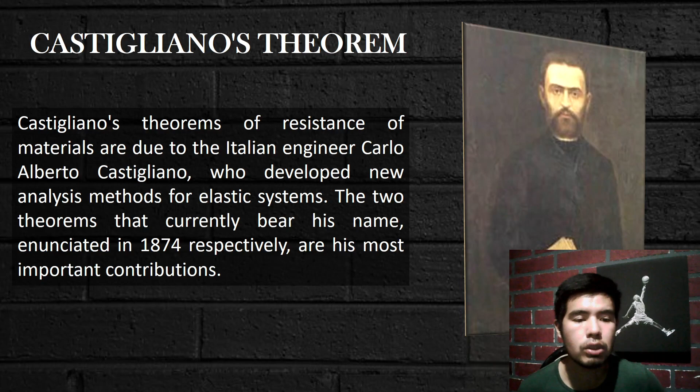What does Castigliano's theorem establish? Castigliano's theorem establishes that, in an elastic system, the displacement corresponding to any force can be found by obtaining the partial derivative of the deformation energy with respect to this force. The terms force and displacement are to be interpreted broadly, as applied equally to moments and angular displacements. Castigliano's theorem is a great tool for determining the deformation of complex structures.

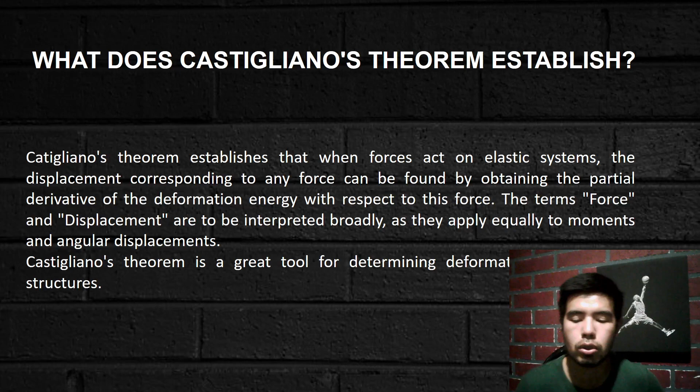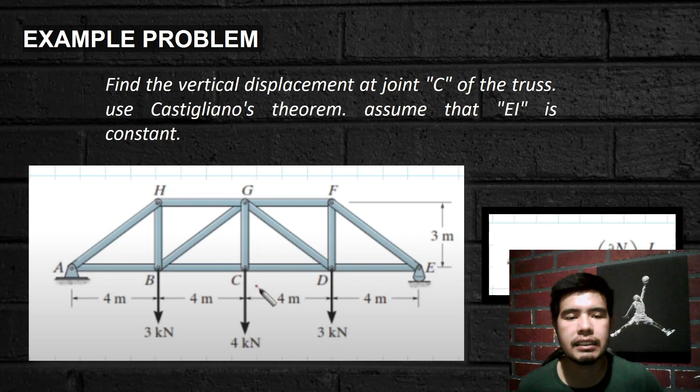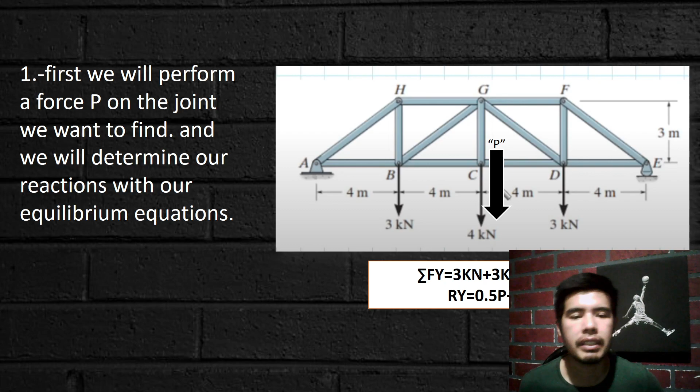Example problem. Find the vertical displacement at joint C of the truss. Use Castigliano's theorem; assume that AE is constant. First, we will apply a force P on the joint we want to find and we will determine our reactions with our equilibrium equations. Second, we will determine each element's normal force.

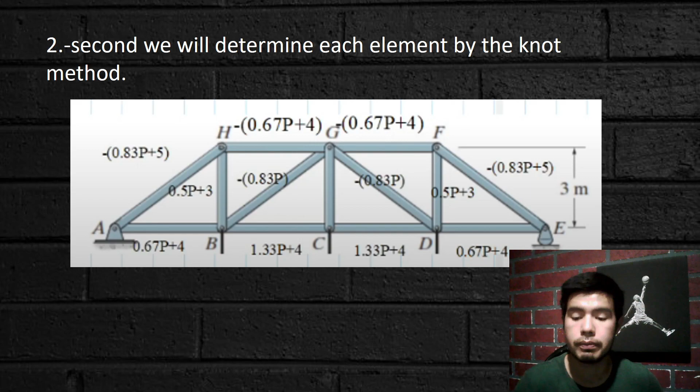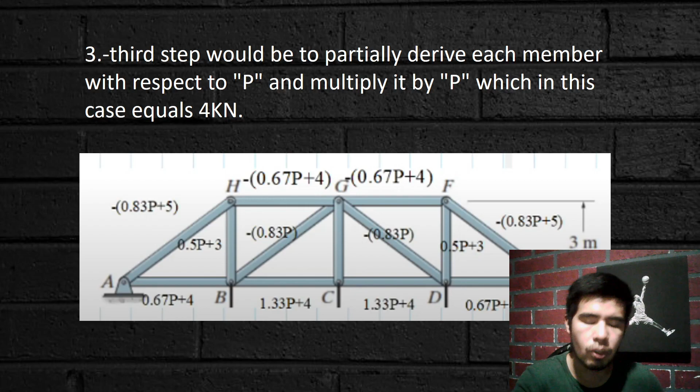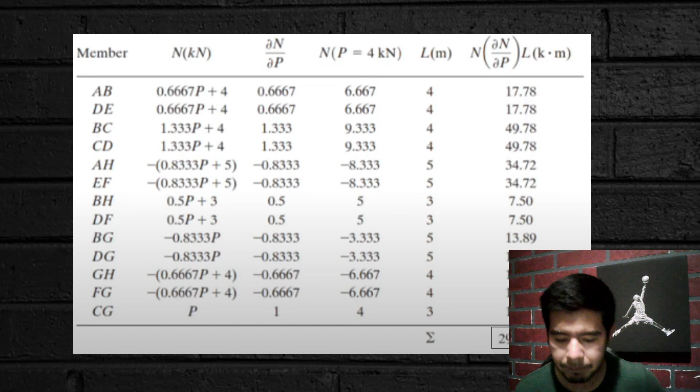Step 3 and step 4: take the partial derivative of each member with respect to P and multiply it with P, which in this case equals 4 kN. Next we will see a table where we show the result for each member based on the formula, and the result of the summation will be 294.89.

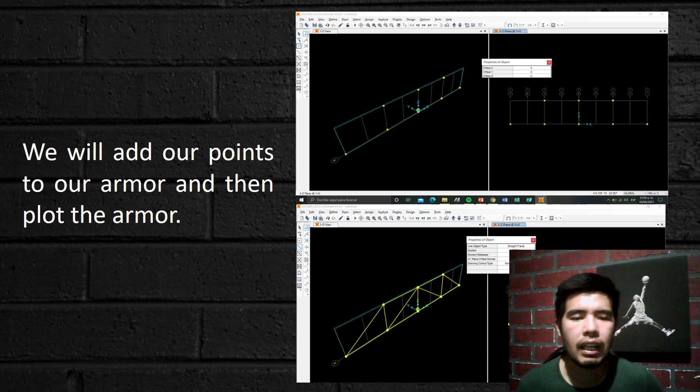Modeling in SAP 2000. First, we will start a new project. It will be a 2D truss. We will work in kN. We will add our points to the truss and the template of the truss. And we will insert our truss supports. The left side is a fixed support and the right side is a movable support.

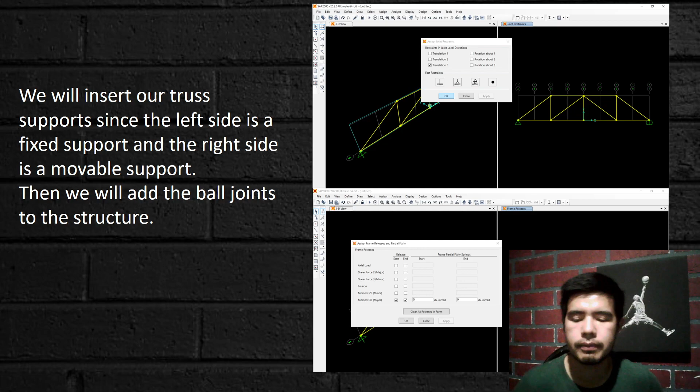Then we will add the joints to the structure. We will define materials, create a new material, define our section and then assign that section to it. We will erase the modal load pattern of the structure since we are handling only dead loads.

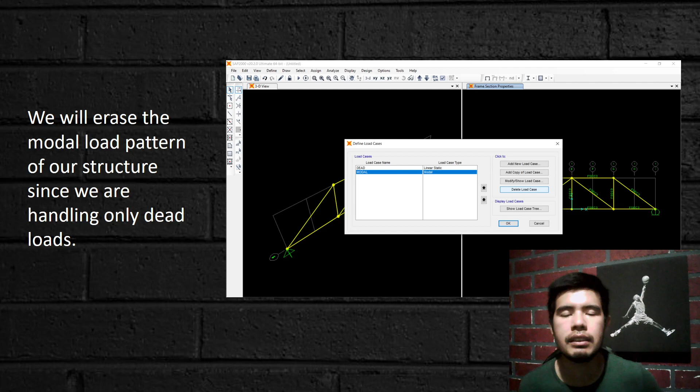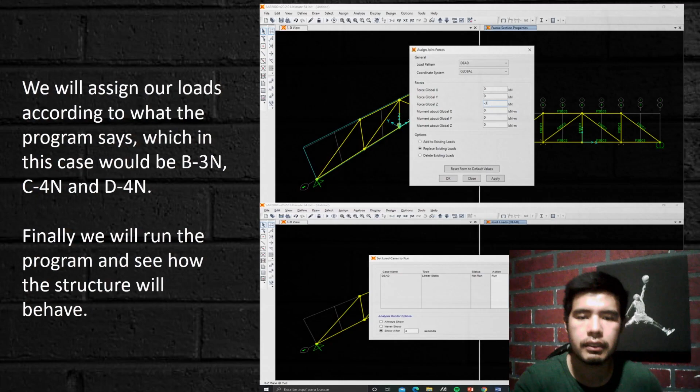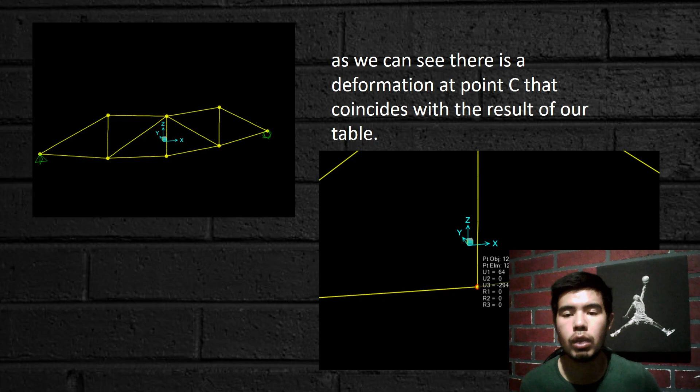And we will assign loads according to the problem, which in this case will be B 3 kN, C 4 kN, and D 4 kN. Finally, we will run the program and see how the structure will behave. And as we can see, the deformation at point C is coinciding with the result of the table, 294.89.